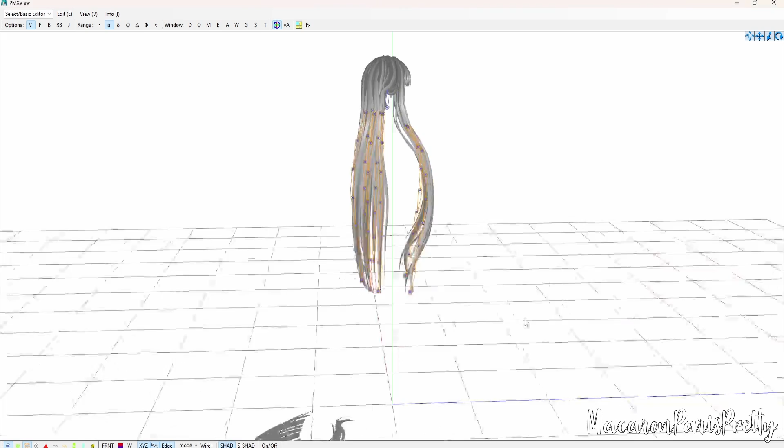So what you're going to do now is you're actually going to remove all the bones except for this one, the one that says the Japanese word for head. Everything else, all the hair bones, you're going to delete them, keep the head bone obviously. Go to the body tab, keep the head body, but delete the rest of it. So delete that. Joints, just Control A and delete all that crap. I usually don't curse on my videos, but today I did, I'm sorry guys.

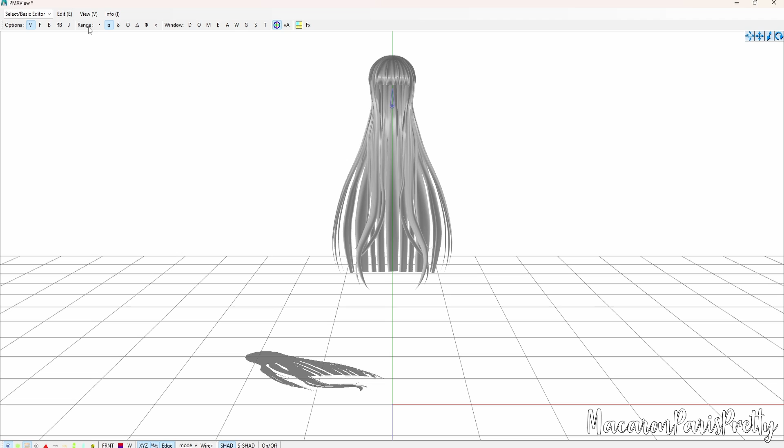And yep, you now have the stuff you need. Next you're going to take the bone that you have, you just click up here on the B tab to select the bone and just highlight the bone. On this W, click that, then click Start. You're going to weight paint at 100%, weight paint the head bone to the hair.

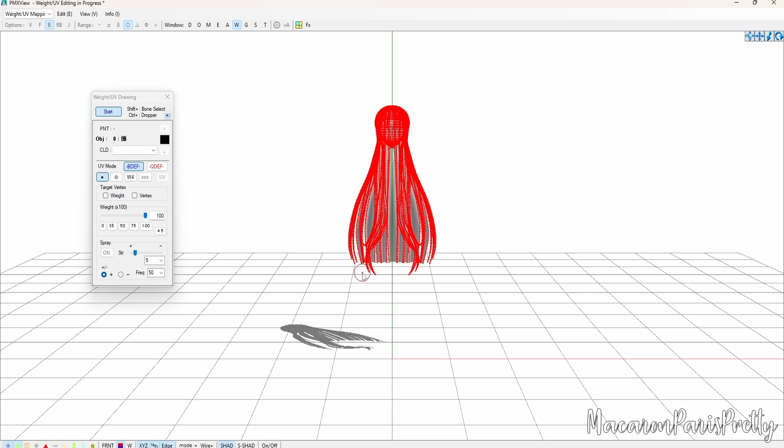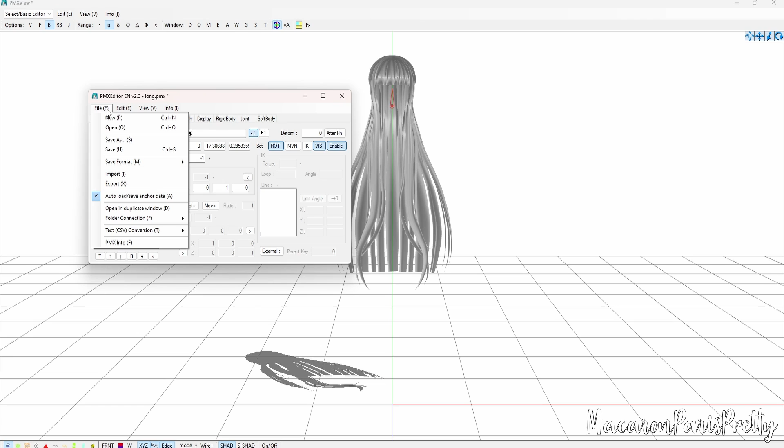Okay, so I think we did all that. We're going to go ahead and push start again to stop the process. Now we're going to go to File, Save As. I'm going to save this as a backup, putting a 1 on the name. Always keep a backup of your original in case you mess up somewhere, like I probably did. Okay, we're done with that, we can exit off.

Now you want this, the Blender. So when you have Blender open, just push A on your keyboard and then Delete to delete all that. Then push N on your keyboard and it'll pop up this panel on the side. Go to MMD, then click on Import.

So you see it says Model, Motion, Pose. Import that model. It's right here, so don't worry about all this other stuff, it's fine. Just push Import.

So now that we have this beautiful thing, I'm going to hide that on the side real quick. Now that we have our beautiful hair, we're going to push the Tab button and it'll go to edit mode.

L, P, and then click By Material. That's going to separate a bunch of stuff that isn't really important, but we're going to pretend it is anyway. Now that we have that out of the way, we're also going to click this sphere icon up here, the second one, because you want the textures.

We're actually going back to object mode, and we're going to remove the textures for both of these. Remove those, you don't need them anymore.

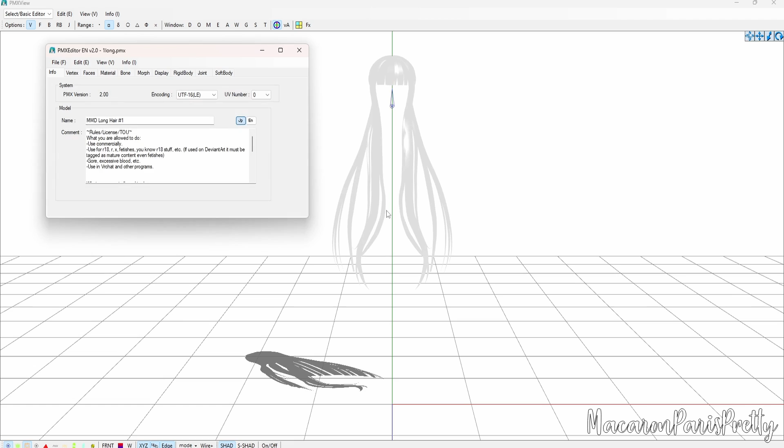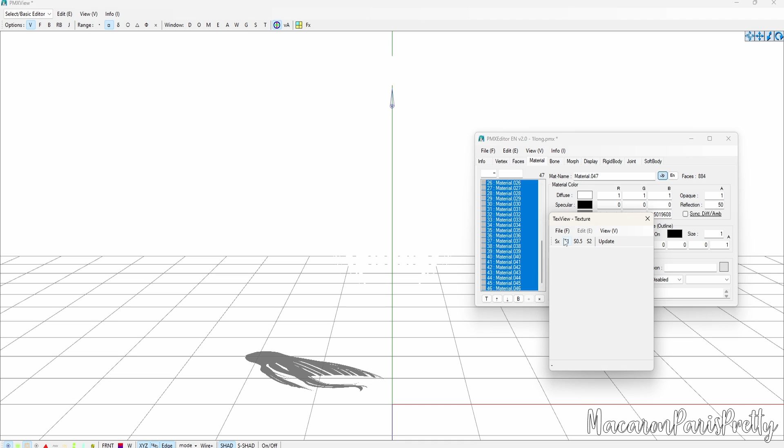And there we go. Okay, so now that we have that, we're going to Control A and just push two-sided. You can also Control A to make all of these the correct setting for the diffuse, specular, and ambient. So you're also going to open up the texture of the original and update. Yes.

You can also take that, Control C, select all those, Control V, and there we go. We have the hair. It's perfect. Well, not really, not yet.

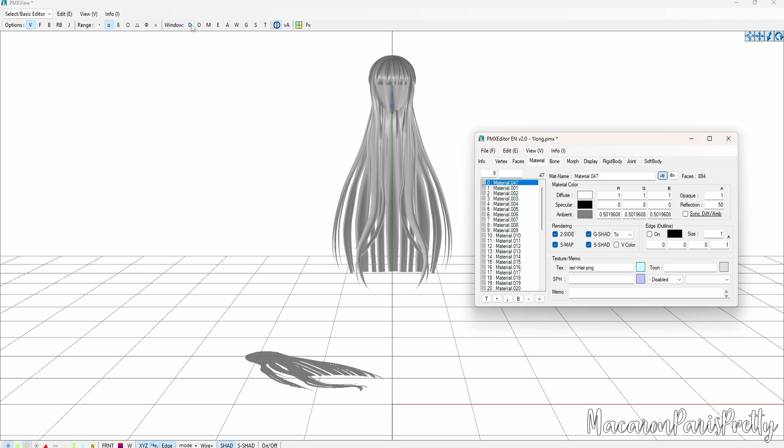Now what you want to do is go to this thing that says M right here, click that, then right click and select none. We're going to try to find each individual strand. This is where it's going to get fun, guys, and time consuming. Especially the time consuming part, that's time consuming.

So with that strand and the V right here, make sure the vertex is selected. You're going to highlight some of the hair, not all of it, just about right here for me would be good, I think. And there we go.

Now what we're going to do is go back in this window: Edit, Plugin, User, Skirt Plugin, Skirt Plugin, and then this one right here. Push PMX Model, and then select Get Model.

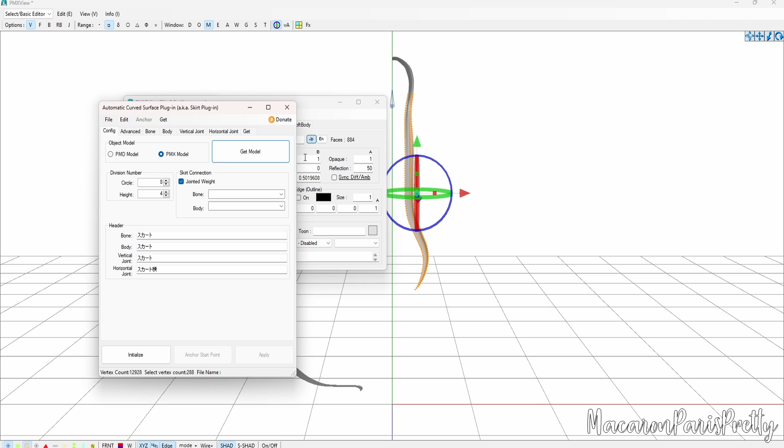Okay, awesome. For this, since it's long hair, you're going to make the circle 1, and the height is going to be 35. The jointed weight, make sure it's both of the head. The bone and the body are the head.

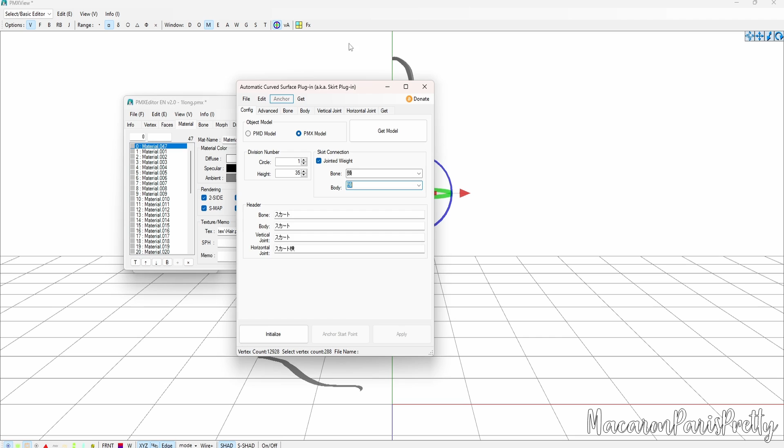If your model was like a rip from Sims or something, you're going to want to make that body yourself. To make the body, you're going to go to Edit. You're going to select the bone first.

Make sure that this B right here is selected, the bone key. You're going to highlight that bone. Go to Edit, Bone, and then Create Rigid Body Bone Tracking. That's what you want for that one. Then you'll have the body for the bone, and you'll be good.

Now, the easiest way to do this is you're going to rename this to the Japanese name that translates to hair. I'm going to have this in the description, but it's going to be this. Then go to body and make the group 6. You can make it whatever number you want, just not 1.

1 is usually what the head bone would be. So make sure the group is any of these, just not 1, and then make sure you select 6 for the non-collision group, or whatever number you chose for the group.

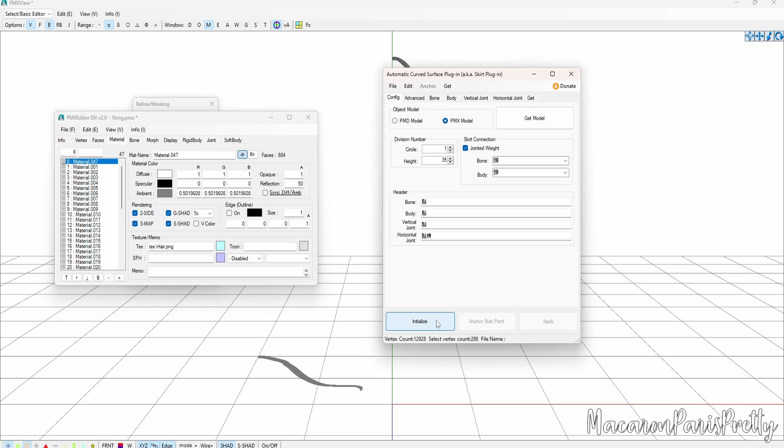Now that that's done, click Initialize, then Anchor Start Points, and select the J. You're going to deselect V and B and select J. J is for the joints.

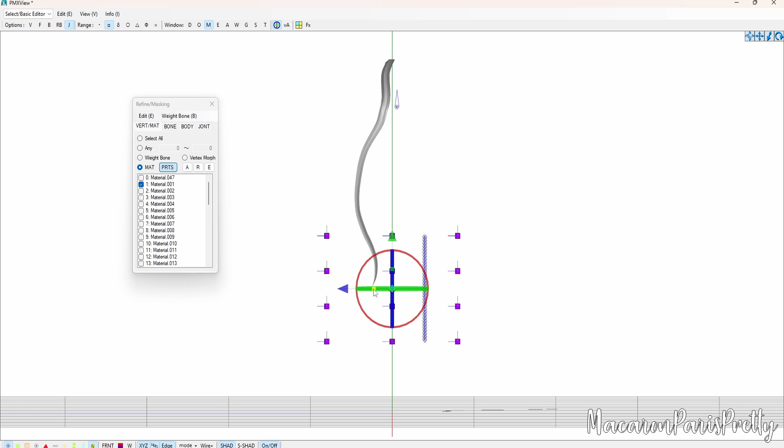To make this look like this, you're going to see that on-off thing? You select that to turn it on or off. This makes it a little easier for me, so I usually have it on. So you're going to select the joints and make them all one line.

Pretty easy, right? You're also going to grow them a little bit and try to fit them as best as you can to where the hair is. So I'm going to move this forward slightly. That's looking pretty decent.

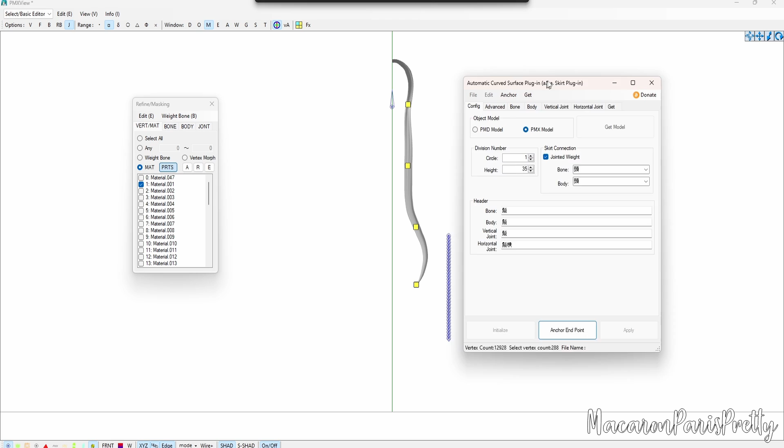We're going to go back to the skirt plugin. Make sure you do not close out of this, by the way. Oh my gosh, if you closed out of this, you're pretty much not going to be a happy camper. So now select anchor endpoints.

And then you have these joints. Now comes, you can exit off this now if you desire. You can just close out of that with the fun part now. We're going to be editing the physics. Woo!

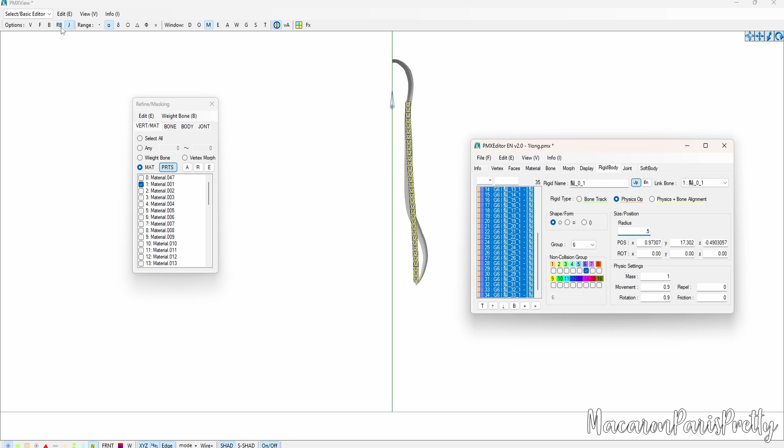Usually for my hair fixes, I'll select from the first one to the very last one, make the form like the circle thing. The radius I'm going to make 0.5 for this. You can make it as big or small as you want, depending on how big your head physics is, which this one honestly isn't very big. I believe it's like 0.2. So you're fine to do the big one.

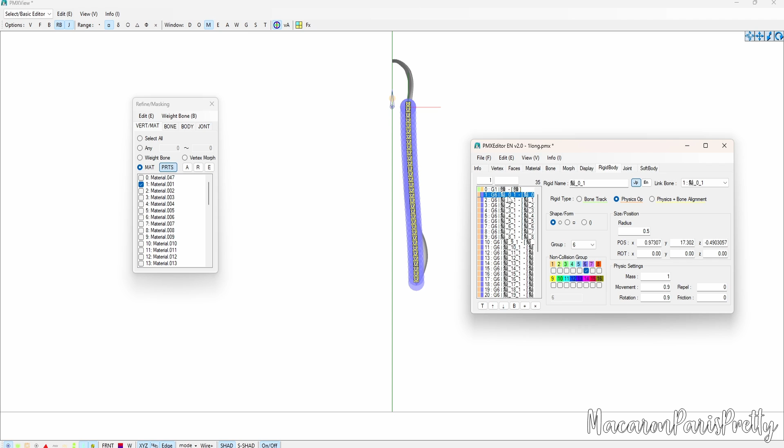But if it's a relatively larger head physics, you're going to want to make either the head physics smaller or the hair physics smaller. Either way, you're gonna want to collide with that. So now we're on to the fun part. Yay! Editing these physics settings.

So for long hair, you're going to select the 0_1. I'm going to do this by 0, 1, 2, because you see these all have the number and then _1. Don't worry about that 1, you just want the beginning number.

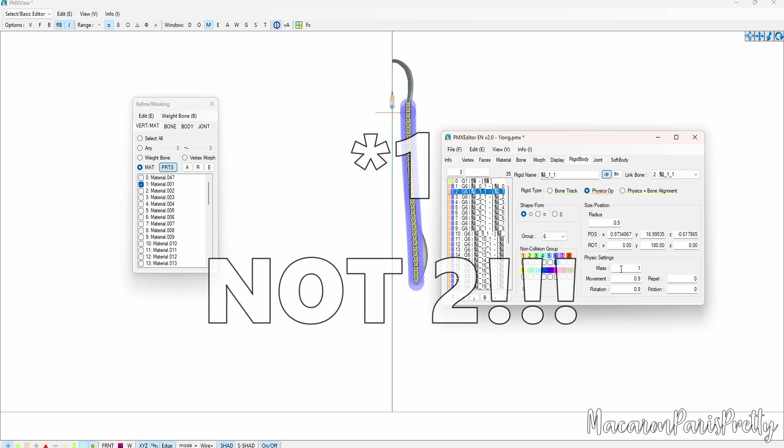So for 0, the mass is actually 0.1, so you don't have to do much to that one. For 1, the mass is 0.09. For 2, the mass is 0.08.

3 is 0.07, 4 is 0.06, 5 is 0.05, 6 is 0.04, 7 is 0.03, 8 is 0.02, 9 is 0.01, and 10 is 0.009 - two zeros and a 9.

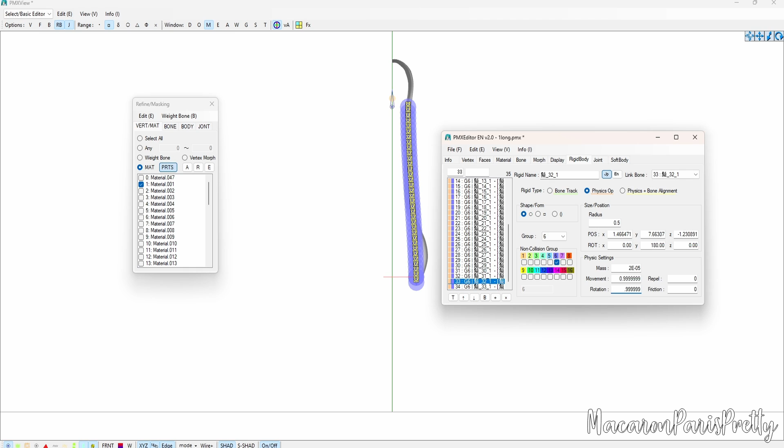And that is pretty much it. You do not have to worry about the joints, don't even worry about those. They're just there for your entertainment. Just kidding, not for your entertainment, but you know, pretend.

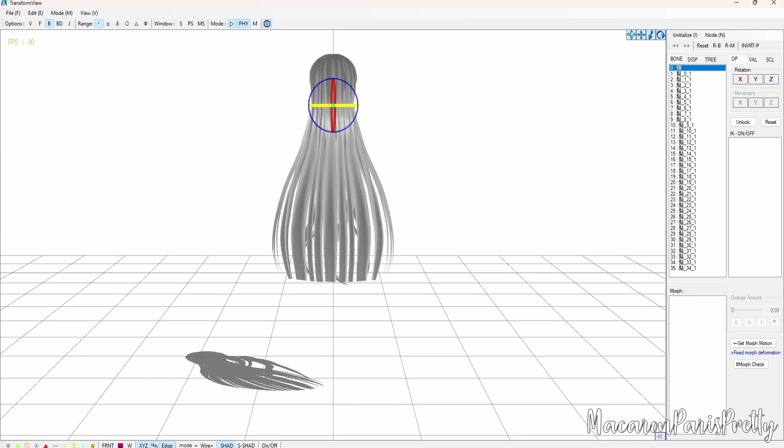So here is what that physics would look like. And obviously if the whole hair was physicky, it would look a lot better. But there you go, there is your beautiful hair physics. Woo, can I just hide that? There we go. Very beautiful, very beautiful, yes, beautiful hair.

So obviously you do that for the rest of the hair. Yeah, I thought it was pretty obvious, but just in case you didn't know, you do that for the rest of the strands that you separated. Just the same process, yeah.

And of course, medium and short are going to be almost the same - I will have in the description what it should be like. For example, for long, circle was 1 and height was 35. Medium and short, circle's always going to be 1 for the hair, however the height is going to be different for each length of hair. For long it was 35, for medium it's usually going to be 28, and for short the height is going to be 20.

And like I said, I will provide everything in the description - what the circle should be, the mass for each of them, what the movement should be, the rotation, and of course repel and friction are always going to be 0, so don't even worry about that.

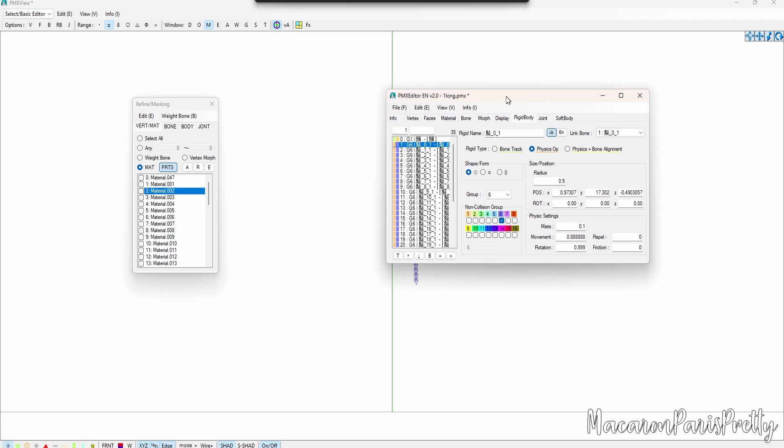I also forgot to mention, this isn't super important, but it would probably be helpful in the long run - when you have PMX Editor open, in the display tab, make a new thing with the plus sign. I've already made this so I don't need that one, but then call it hair in both English and Japanese, make the hair tab thing, and then add your hair bones to that. This would be so much easier if I were right - oh, I actually did it. Anyway, so add your hair bones to that, and then save it again, and you're good to go.